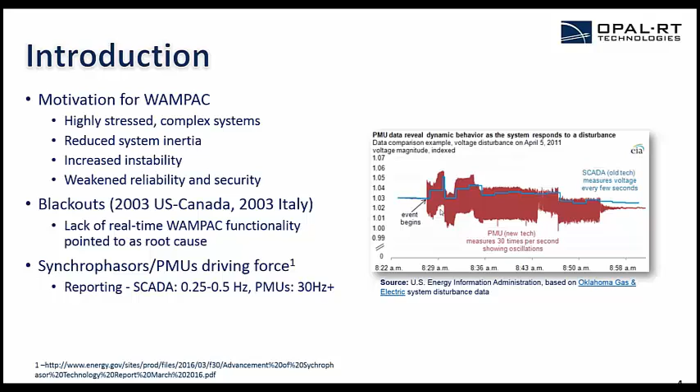Now, these devices and these systems, they are noteworthy because not only do they go between physical locations, they go between jurisdictions, organizations, companies. So it's not just a technical issue implementing these things. It's political, it's organizational, it's law. And what are the effects? So this project has had quite a bit of success. They've dealt with major players in the industry, including Entergy, Duke Energy.

So what the players have found is that they've actually been able, in many cases, to increase system reliability, increase asset utilization and efficiency, power system efficiency, and organizational efficiency. And they've done that through introducing several real-time capabilities as well as study mode capabilities, many of which can be tested using hardware-in-the-loop simulation.

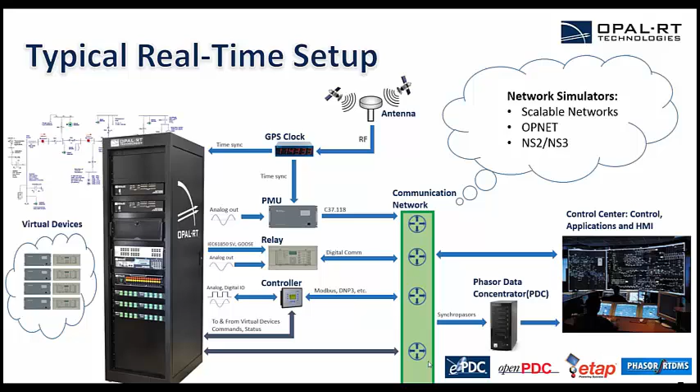We know there are certain researchers who have used OPNET. We're looking at scalable networks too, since it seems to be a very robust real-time solution. And at the end, you're looking to connect to applications, whether they be visualization or even controls. So these are some of the applications we've connected to in this sort of setup.

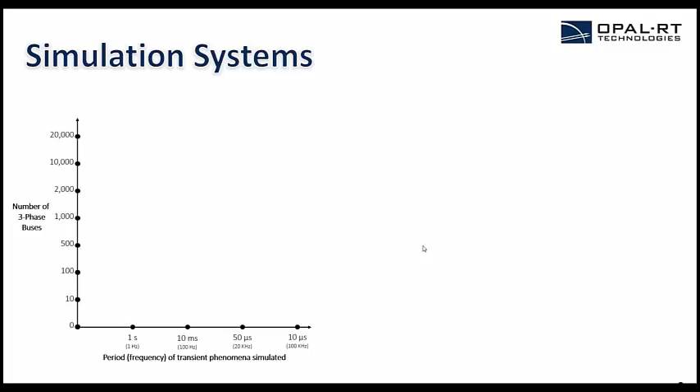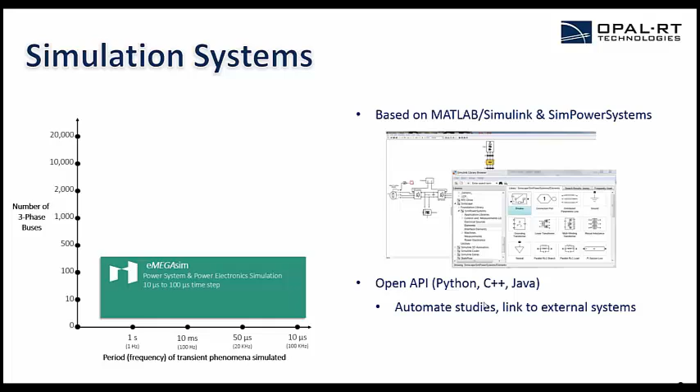And in terms of software, we offer eMEGAsim, which is electromagnetic transient simulation. This type of solution is based off MATLAB Simulink and SimPowerSystems. It's very popular in universities and with users that already know the simulation tool. And it's nice because you're able to automate many functions, and as you'll learn from Luigi, hack it.

The benchmark for this software—we mentioned it can do up to roughly 400 three-phase buses. Well, this is actually a network that was simulated using eMEGAsim, delay-free, so no delay introduced between processing cores on the multi-core computer. It's effectively a regional distribution network with 750 nodes in Italy, a real one. So you can look that up to learn more.

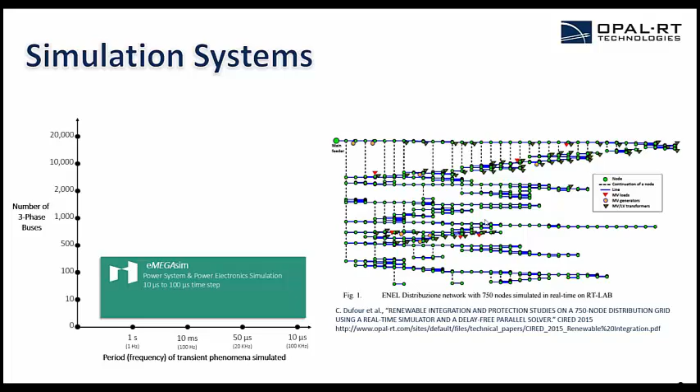And then we have HYPERsim, which was actually developed by Hydro-Quebec, and this is also a very capable software. It's capable of modeling thousands of buses. It automatically distributes simulation across potentially hundreds of processors if you have such a supercomputer. And it also supports automated testing.

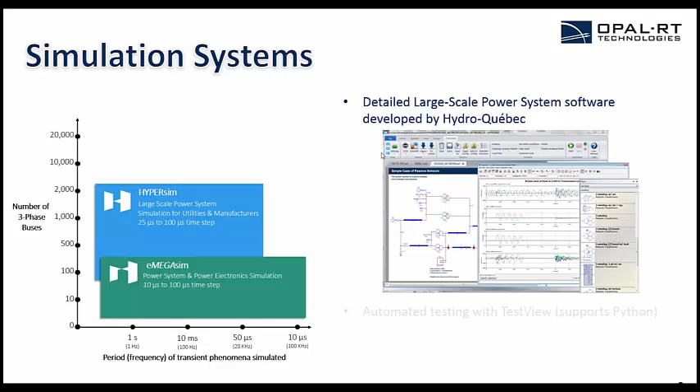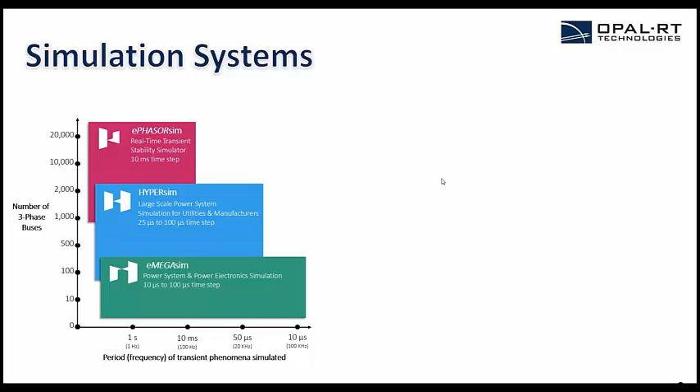And finally, which is a really interesting software for people looking into wide area research, is ePHASORsim. This is an electromechanical real-time transient stability simulator. So unlike the EMT software I just mentioned, it only supports a 10 millisecond time step. You're actually able to import PSS/E, CYME, or DIgSILENT PowerFactory networks directly into that.

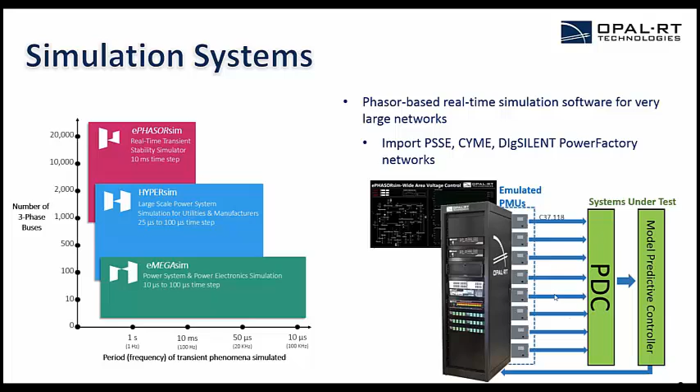You can also model other functions in OpenModelica, so you can bring in your own custom generator models or transformer models. And it allows you to do this sort of simulation where you effectively model a wide area and can model potentially hundreds of PMUs to connect to a controller on the other end.

So this is a more recent product, and we've actually succeeded in finding several clients in industry and academia that have found this application interesting and useful. We're looking forward to seeing more results from them.

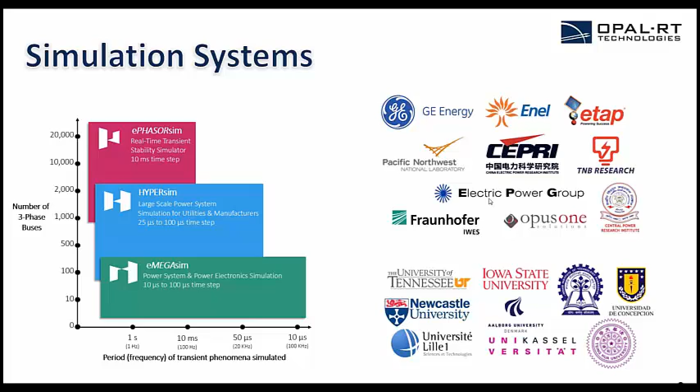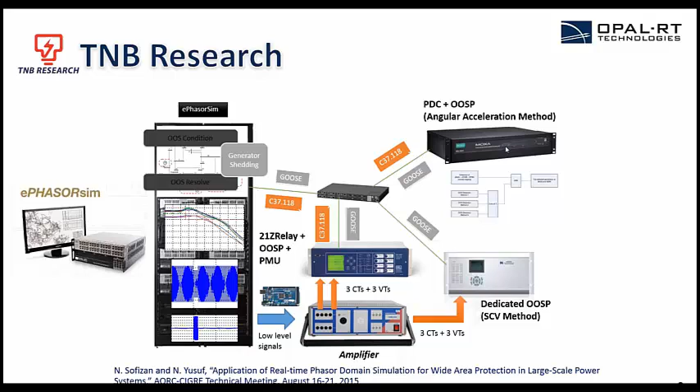One of those clients is TNB Research, and in fact they have a setup where they use ePHASORsim to test and develop an out-of-step protection control system. They've done that using C37.118 streams sent via dedicated relays, and actually from the simulator as well they send commands to generators using GOOSE from the controller. It's a completely closed-loop setup.

Using HYPERsim, this is recent—at NASPI we presented a bit on PMU pre-certification. Certification is very expensive, as some of you may know. So the idea here is, what if you use a real-time simulator to pre-certify your PMU prior to sending it to the lab? There are two ways of doing this.

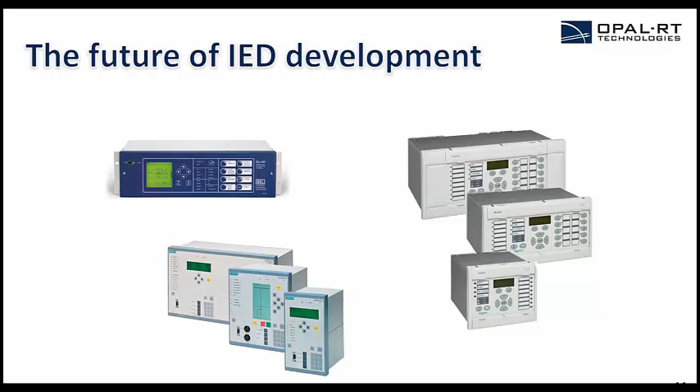Now, some of you are used to seeing these things in your lab or in the field, and you can't really get inside them. They're closed systems. So we've actually partnered with National Instruments to provide an open system for IED development.

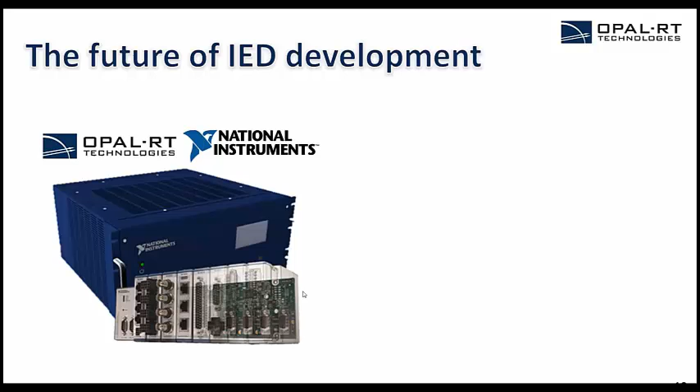The idea there is, effectively you get a box, but you're able to open the box, you're able to change all the modules within, in this case, a compact RIO. And not only that, you're actually offered a library that's already been tailored for the power system industry. So you have the communication protocols that are used in the field, you have tools that you can take, you can modify, and I know Luigi's going to talk about his open source projects, so this is definitely the way of the future.

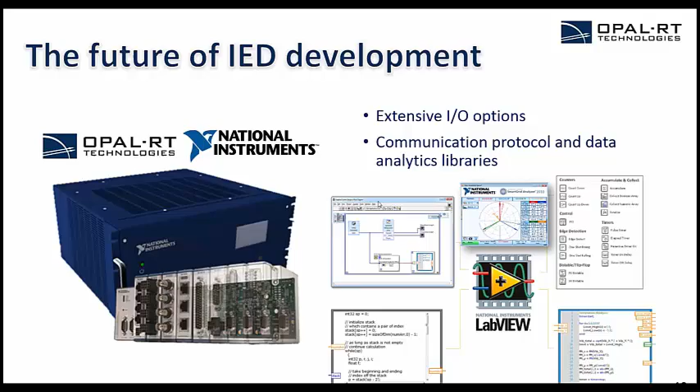We're looking into giving users even more options when it comes to actually making hardware. So it's not just about delivering a simulation tool, it's about delivering the actual hardware that can be used to perform work. So that's my bit, and next up we have Mario Paolone.

He received his Master's in Science and PhD from the University of Bologna in Italy. In 2005, he was appointed Assistant Professor in Power Systems at the University of Bologna, where he served as a Power Systems Laboratory Professor until 2011. Currently, he has since moved to the Swiss Federal Institute of Technology in Lausanne, Switzerland, where he is the EOS Holding Chair of the Distributed Electrical Systems Laboratory. In 2013, he received the IEEE EMC Society Technical Achievement Award. He is the editor-in-chief of the Elsevier journal, Sustainable Energy, Grids and Networks. His research interests are in power systems with particular reference to real-time monitoring and operation, power system protections, power system dynamics, and power system transients. He is the author or co-author of over 220 scientific papers. So without further ado, here is Mario.

Thank you, Thomas, for your kind introduction. I hope that you can see my screen.

The title of my contribution to this webinar is Hardware in the Loop Architectures and Application Examples. My presentation is essentially split into two main parts. In the first, I'm going to talk about the elements that your HIL architecture should take into account when it comes to the simulation environment that you're going to set up. In the second, I'm going to show you three application examples related to WAMPAC systems.

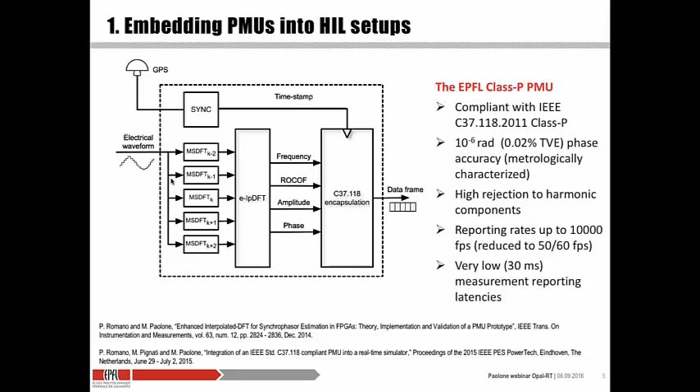The second element that you should take care of is the time synchronization. You have to be sure that you distribute your time sync into the various modules of your HIL setup. In our setup, we are using a Spectracom TSync PCIe that is capable of distributing time synchronization towards the various targets.

Why do you need that? Essentially for 2 reasons. The first one is very obvious: you want to distribute the time to the PMU to time tag your synchrophasor.

That's obvious. The second reason, less obvious, is that this gives you the possibility to time tag the computation of the simulator. You can tag the outcomes of the integration of the differential equations into the simulator. This gives you the opportunity to time tag the true information in the simulator and compare it to what you are sensing outside. This is something you cannot do in the real world, because in the real world you don't know the true state of the system. I will come back to this point later.

The third element you should take care to model is the sensor models. I'm not going to talk about linearity, bandwidth, and saturation, because this is pretty standard, and you can find libraries capable of representing these aspects. What I'm going to talk about is how to embed the noise of the sensors into a real-time simulator.

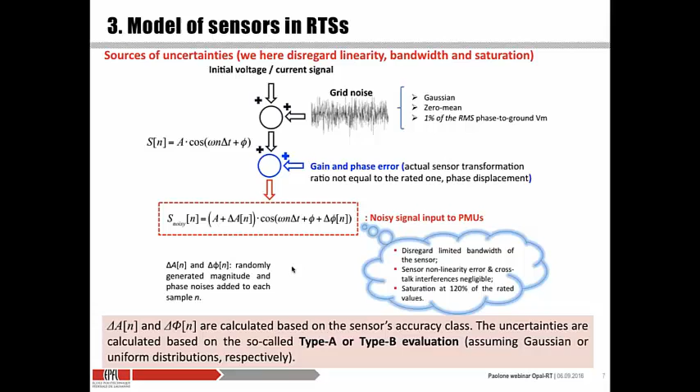What's the output of this kind of stuff? Well, essentially, by adding this noise, you are creating noisy inputs in your PMUs, and these are examples of how these noises affect the amplitude and phase estimations of a PMU. This shows how resilient your synchrophasor extractions are against the presence of noise due to the sensors.

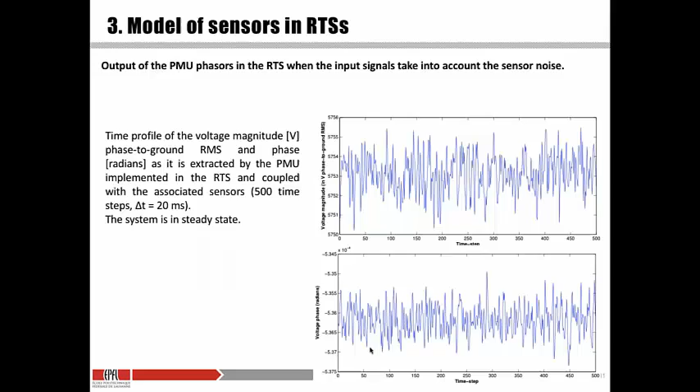So let's jump to the part on the applications.

Of course, you can do that only if your system frequency is constant, and in particular, if it is equal to one of the bins of the DFT. So in this case, you can really tag which is your true system state. At the same time, you're distributing also the clock to your application. In this case, it is the PDC.

Where you also do the aggregation, and then you're pushing the data frames to your application. In this case, it is a simple state estimation process. It can be either a least squares process or a Kalman filter. So that's the application.

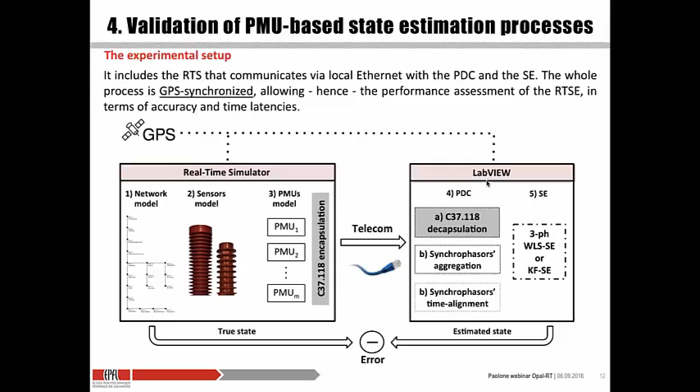What you can do with that is characterize the performance of your state estimator. Why? Because you can inject bad data into your simulator. You can inject biases in your sensors. You can also remove some of the data frames, so you can see how robust your state estimator is against these kinds of failures in the sensing system.

So here I'm going to show you how we did this setup when we have dynamics which are embedded into the nodes. In particular, we're embedding dynamic loads or distributed generators by using controllable current sources in this specific case. So considering the true system state, since we're not changing the system frequency, essentially you can compute exactly one of the DFT bins, and this is what you can baptize as the true system state.

So this is what the simulator is computing, which is then fed to the sensors, which are then adding noise and nonlinearities to that, which are then sensed by the PMUs and then estimated by your state estimator. So actually you can metrologically characterize the whole chain from the true system state down to the estimated ones, and then you can do a comparison of the performances of your state estimator. So this is what you get.

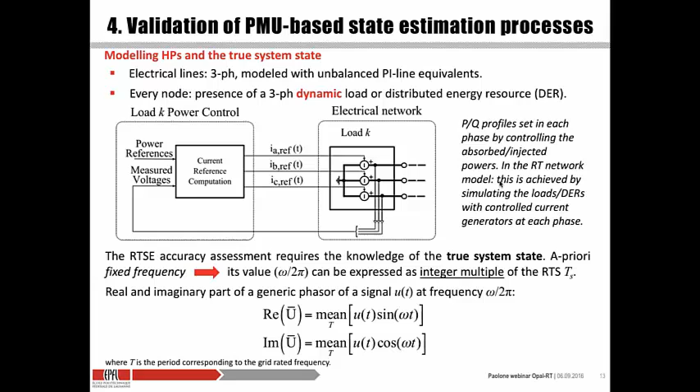So we are using a true system. It's a distribution system that was the target of an FP7 European project. Actually, it's a system located in the Alliander grid in the Netherlands. Here you can see the configuration. It has 18 buses. It's a 10 kilovolt line-to-line system. We also have distributed generation. And we are sensing 10 out of the 18 nodes with PMUs.

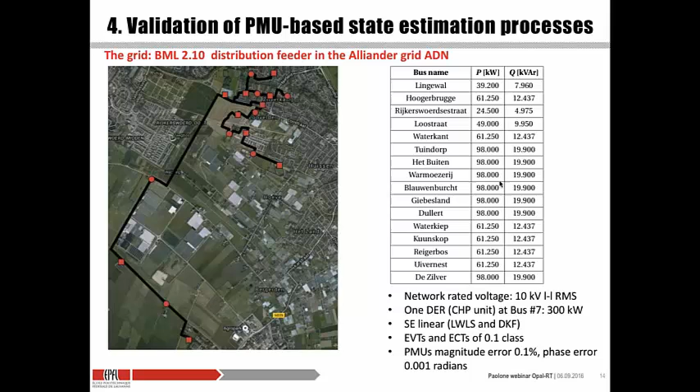These were real PMUs. And before going into the real field, we ran a real-time simulation to characterize the performances of the state estimator. So through the process I was describing before, we were able to characterize the means and the standard deviations of the absolute errors in the magnitudes and phases of the state estimates. So here you can see the four quantities, namely on the top you see the voltage magnitudes in per unit, means and standard deviations, and on the bottom the same quantities, means and standard deviations, for the phases of the phase-to-ground voltages.

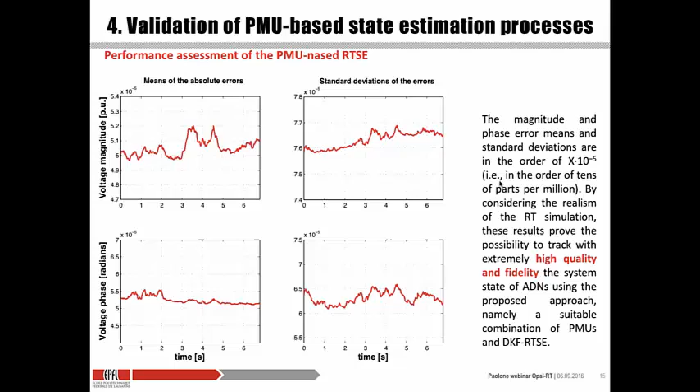So you can see that we are obtaining quantities which are jittering in the range of 5 times 10 to the minus 5 per unit for the amplitudes, and almost the same quantity also for the phase. So essentially, after running this characterization, we're saying to the operator, look, if you are going to have this noise level and you're going to deploy this sensing infrastructure, these are the kinds of uncertainties you can get in your assessment of the system state. So it's a kind of performance assessment.

So the second element that we were able to test was time latency. Essentially, we were interested in characterizing the latency from the moment we were collecting the PMU measurements, the moment these measurements were entering the PDC, the moment these measurements were pushed into the real-time state estimator, and the moment the state estimator was capable of estimating the system state. This is important if you are interested in closing the loop, as we'll see in a while, if you want to do voltage control or fault handling applications.

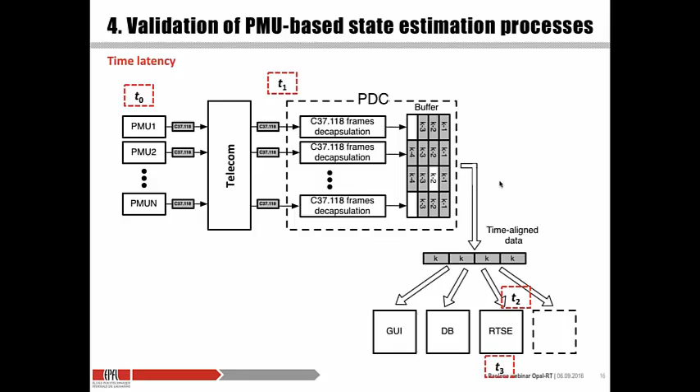So this is the kind of information we were interested in: characterizing essentially 3 latencies in these 4 time instants. And these are the kinds of results that we get. Essentially, we were able to assess, with the HIL architecture I was describing, the 3 cumulative distribution functions of these 3 delta t's.

So essentially, we were able to close the loop from the moment we were sensing to the moment we were estimating the state. This was essentially providing us an average latency of 53 milliseconds with a jitter of less than a millisecond. And this is a kind of information which is particularly useful, especially if you're interested in fault location or relaying applications.

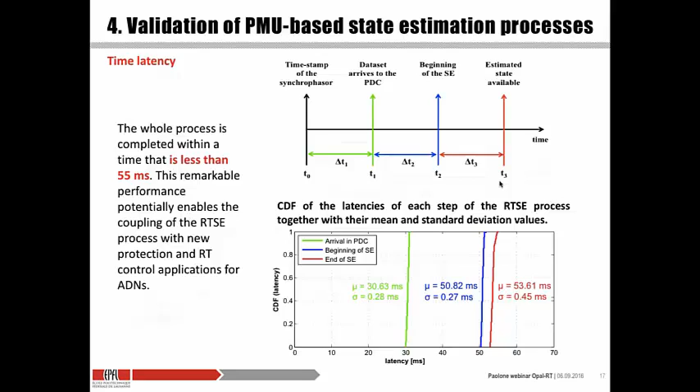So you should be able to characterize which is the jitter of your information data flow. So the second application I would like to show is relying on the system state estimation. So essentially, we are assuming to know the system state with a pretty high refresh rate, and we would like to use this information to do voltage control.

So essentially, we have an online centralized optimization tool, which is computing sensitivity coefficients. Sensitivity coefficients are essentially how much a voltage is varying in a given node as a function of all the injections. These coefficients can be computed as a function of the system state in a closed form. We have a paper that has shown how to do that. And now we would like to see how we can use these sensitivities to distribute the control through broadcast signals.

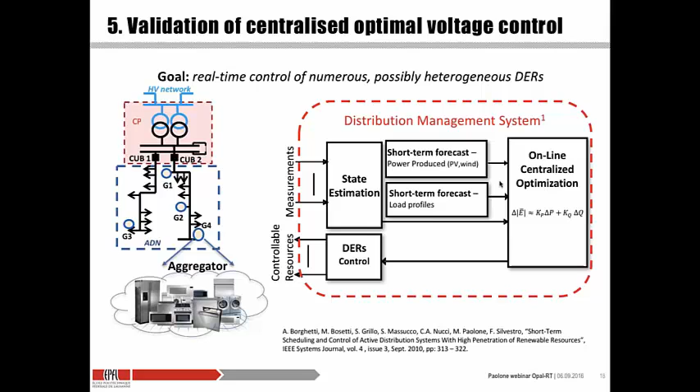So essentially, we would like to distribute broadcast signals to aggregators, which are distributing them in the form of broadcast signals to thermostatic controlled loads, so traditional demand-side applications. We are broadcasting signals per node, and these broadcast signals are unique per each network bus. And we would like to see how this application, which is described in these 2 IEEE Transactions papers, can be characterized in terms of latencies in the hardware-in-the-loop application.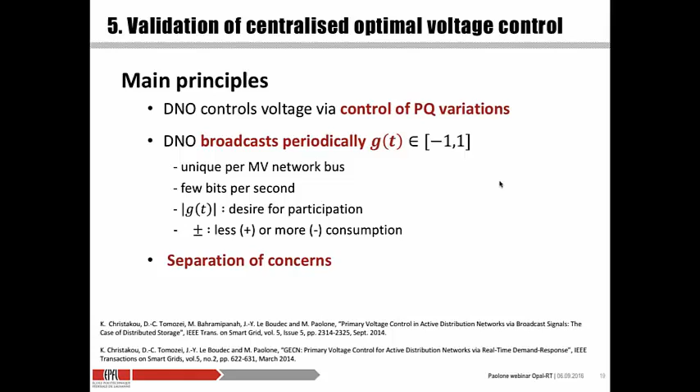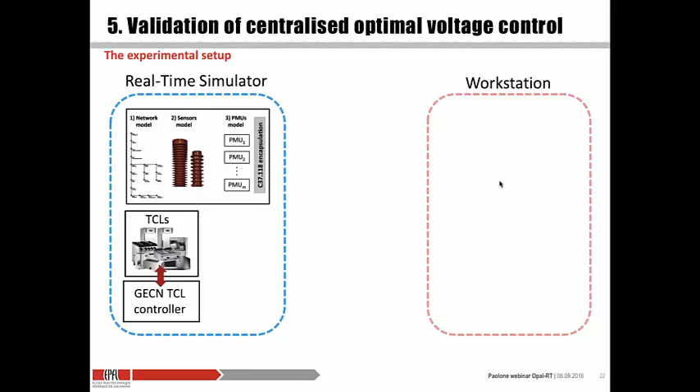So essentially, we have the same setup as before. We have a real-time simulator, which is embedding the network model, the sensor models, and the PMUs. On top of that, we also embed into the network model the thermostatic controlled loads and the controllers, which are playing the game of these broadcast signals. At the same time, we're embedding into the simulator non-elastic demand, because TCLs are, on the contrary, elastic demands, and active generation, in this case non-controllable PV resources.

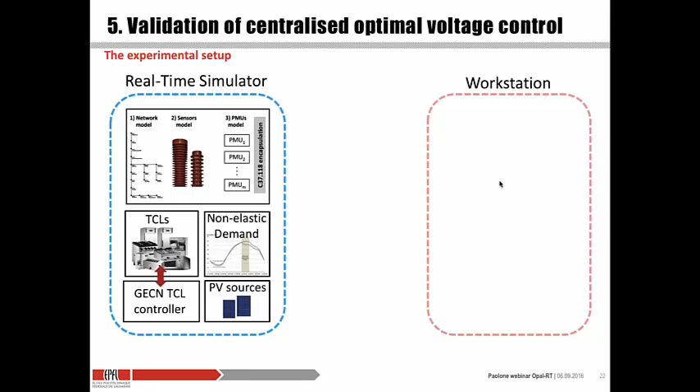So essentially, we send PMU data to a workstation, which is containing a PDC and a state estimator. The state estimator is feeding the demand-side centralized optimization tool. In this case, you can see this acronym GECN. GECN stands for Grid Explicit Congestion Notification. It's a kind of protocol that we're using to compute the broadcasting signals for the demand-side management.

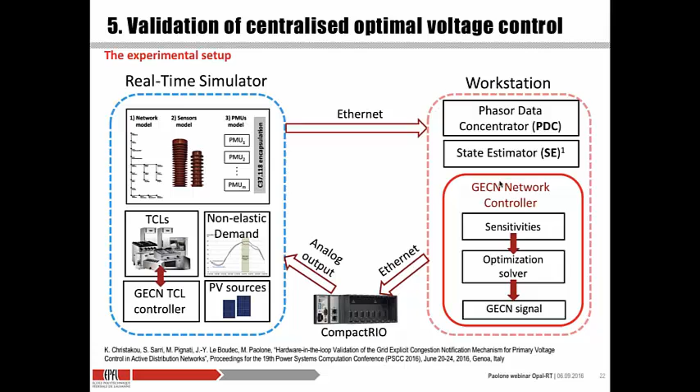So essentially, we compute the sensitivity coefficients, we feed an optimization program, and then from the optimization program, we compute the broadcast signals per node. Then we distribute the broadcast signals through a CompactRIO that is then feeding this back into the analog inputs of the real-time simulator, and we close the loop. So everything is GPS synchronized. Again, we are using the same distribution system we were showing you before. So it's the same network of Alliander.

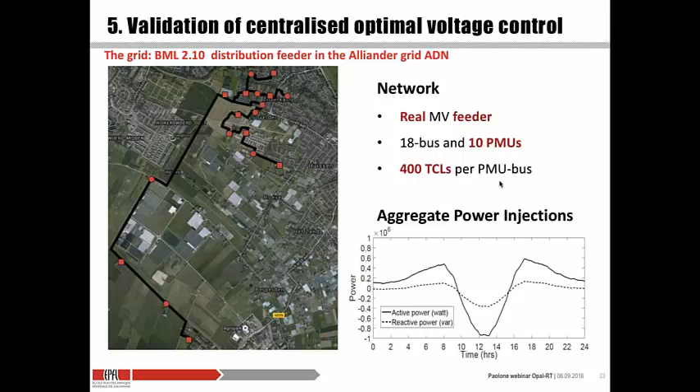Again, the same configuration. Here you can see the aggregated power injections, active and reactive power. You can see that there is a big hole in the middle of the day. Why? Because this is the typical effect of the PV injection. So you can see a kind of duck curve, you know, the duck curve from the California ISO. Here you can see a scaled version in a distribution network.

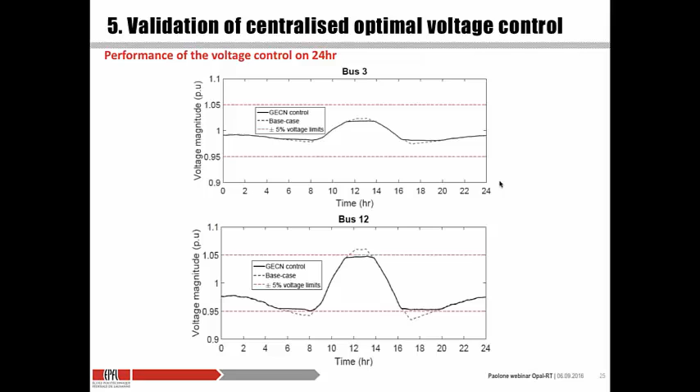So here you can see the performance of the voltage control on a 24-hour profile. We were running a real-time simulation for 24 hours, so it was a simulation that took 24 hours to be completed. On the top you can see bus number 3 is a bus where you don't really need to do voltage control because the voltage is always within the bounds. On bus number 12, on the contrary, you can see the effect of the GECN controller to keep the voltage within the bounds. And you can see the effectiveness of this control loop in this HIL simulation.

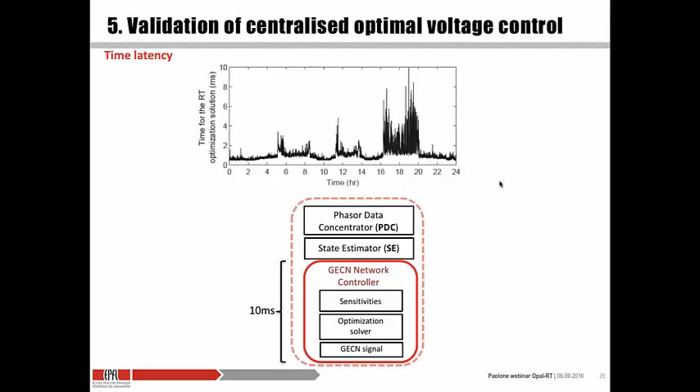The last application that I would like to show is about the use of this framework to do fault location. We published a paper in IEEE Transactions on Power Delivery in 2016, where we are essentially using state estimation processes to locate the faulted line. The principle is very simple. We're running parallel state estimators. In these parallel state estimators, we're able to add a virtual bus. This virtual bus is essentially a bus that is containing the fault.

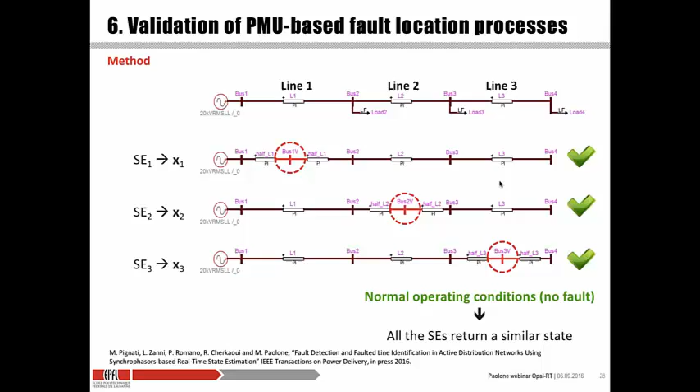So if you don't have a fault in the system, all the state estimators that contain this virtual bus are providing you the same results. If you quantify the weighted measurement residuals of these state estimators, they're providing more or less the same kind of numbers. As soon as you have a fault in your system, for instance, here I'm adding a fault in line number 2, only state estimator number 2 contains the right topology. Therefore, the weighted measurement residuals of state estimators 1 and 3 will explode, literally.

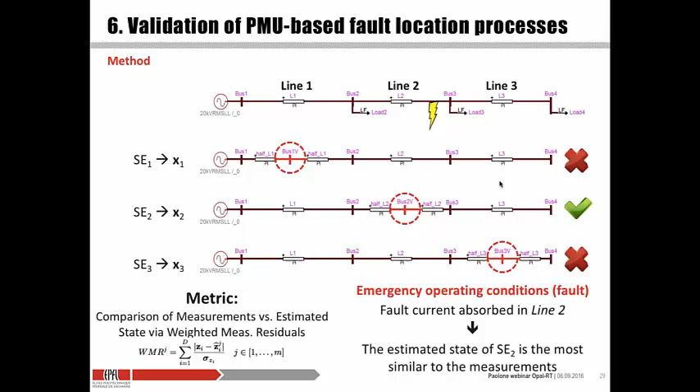And only the WMR, which is briefly recapped on the bottom left side of the slide, is kept at a value which is comparable to the conditions before the fault. So this is the metric used to distinguish which is the state estimator with the right topology, which essentially tells you which is the correct line that has the fault.

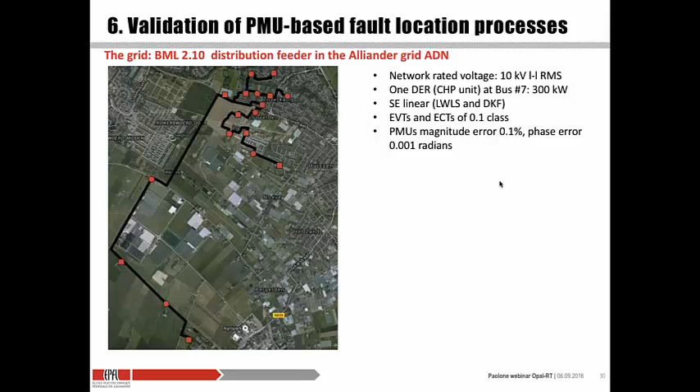So this is the kind of application you can also imagine deploying in your HIL. For this specific case, we were able to test fault location applications and validate whether our process was able to detect, identify and locate fault types which are symmetrical or unsymmetrical, namely single phase, two phase, three phase. We tested fault impedance up to 1,000 ohms. We were capable of testing radial and meshed systems, and neutrals that were isolated or grounded.

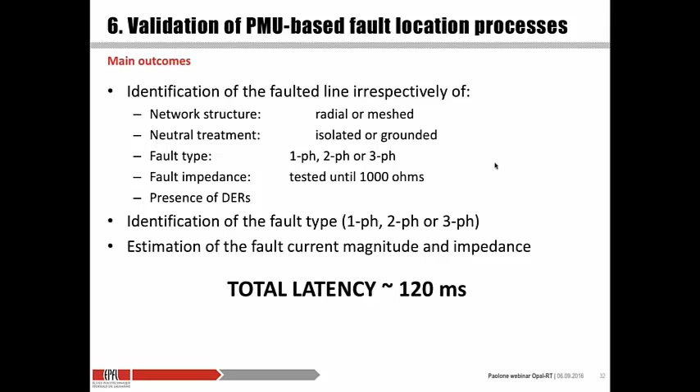So in summary, HIL are fundamental tools to run performance assessment of PMU-based processes. Fundamental elements, beyond the grid model, to be represented are time synchronization, synchrophasor estimation processes implemented in metrologically characterized PMUs, and sensors in terms of noise, saturation, linearity, and bandwidth. The potential applications you can feed once you have fulfilled these elements are PMU-based real-time state estimators, centralized optimal voltage controls, line congestion management, which I have not discussed, and fault location. Of course, there are many more applications, but we focused only on these specific ones.

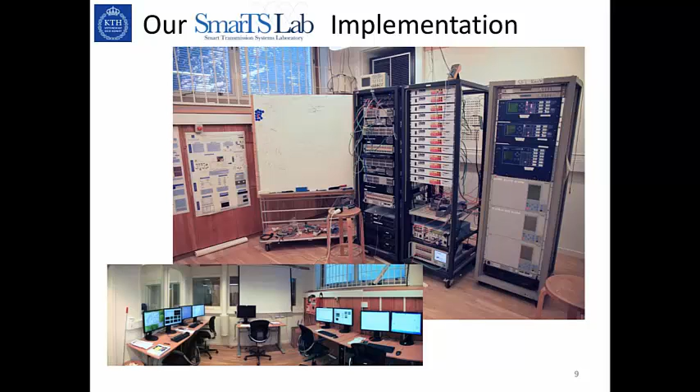So if you're going to deploy it in the field, provided that your simulator model is accurate enough, pretty much things will work. So people cannot claim that my stuff only works on paper, but we're actually taking that extra step. And to do that, here's a little flowchart of how we work. Okay, so you have to develop a model, and I will show you one of the active distribution network.

Then you need to configure the model by going into the backplane with the analog outputs, or as Mario explained with configuring the streams from PMUs. In this case we configure the analog outputs and feed either amplifiers or directly the PMUs through the low voltage interfaces. All of this equipment has to be configured.

You have to download firmware for the compact RIOs, and you have to configure it, and then configure the PDC to read the data. So it's not like plug and play and go. You need to do a lot.

To stream the PMU data, you have to configure all the PMUs, and then create something called output streams. These output streams are actually the basis I use to decouple what is a PDC, which I think should be left alone to do its job of concentrating and time aligning data, from what is an application development environment, which could be any workstation located anywhere and be able to read this stream and use the data.

So how do you implement a new application? Well, it turns out there was not much back when we started. There was OpenPDC and it was really hard to do. So we implemented different kinds of mediators and toolkits.

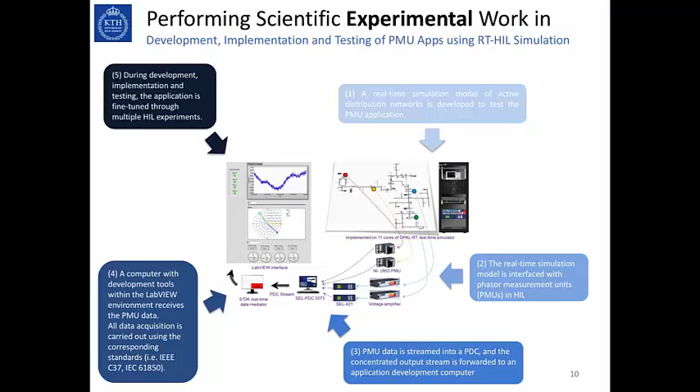I think this is a really nice example. I call it the golden crown because it's really a nice model, I think. Almas, my student, has developed some gigantic models also, but I give a chance to somebody else to show their work. So this was done mostly by a student called Hossein.

He's a postdoc still, and the first version is published in Mario's journal, where he's the editor-in-chief. You can just click there and it's open access, and what you have here is like 79 nodes and 10 different components, deployed in the first version in 11 cores of the eMEGAsim simulator.

Where you see here, wind is a wind turbine. You can see somewhere a battery - I think this is energy storage. No, this is an energy storage. You have some PV. You have protections in the model.

So it's really, really a nice model, and the aim is that you have transmission, medium voltage, low voltage, and residential low voltage. So you have three-phase and single-phase, and so on. It's a really nice model to try to understand active distribution networks.

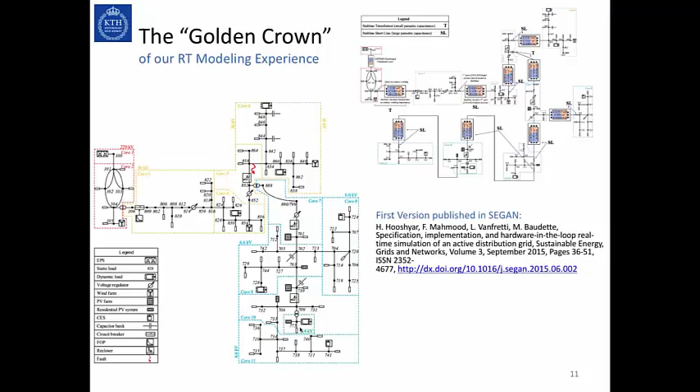A little bit more work has been done recently with Christian Dufour, actually the guy from OPAL-RT who develops the Artemis library. The methodology we have here is called stubline decoupling, which introduces errors into the simulation. So we thought we should get rid of that. This SSN, State Space Nodal Solver from OPAL, was used to implement this model.

Now not only do we get more accurate results, but we also use fewer cores. This is down to 7 cores using this technique. So that's really nice.

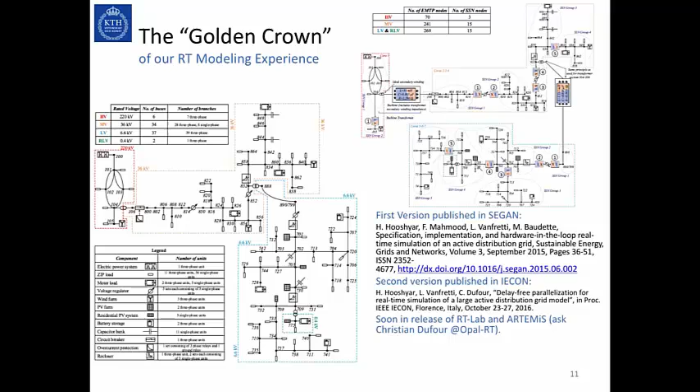It will soon be released in RT-Lab in the libraries from ARTEMiS. But if you don't want to wait, just go to GitHub. Here's a link, and you can download it and play with it. It's released under the GPL version 3 license, so make sure you read what that means.

You're supposed to make things - if you're going to distribute some new version, you have to make the source available to everybody else.

All right, so now you have the model ready. What are... there's no such thing as a real-time monitoring application - that's useless, because you cannot react in real time. You have near real-time monitoring applications, and this aims to provide fast updates in near real time. So 10 seconds, I would say, or tens of seconds to a few minutes, when reaction is still possible with a human being.

Okay, so this is near real time, because real time is 1 second equal to 1 second, and if we talk real time in terms of loop cycles, then you're talking a few tens of milliseconds. So using a library that we'll show later, we have implemented all of these different applications. You have monitoring and visualization. Here are the references you can take a look at.

Some mobile applications. This is a really nice hack, because once we had our toolkit in LabVIEW, we just used the LabVIEW toolkit to implement these mobile applications, and it was really fun.

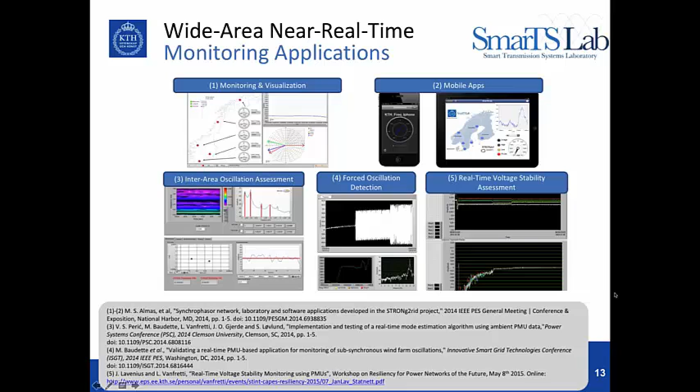So that's for monitoring. There's a new application here using this model. The idea is that you can monitor transmission and distribution grids at the same time and decouple their contribution to voltage stability. What does that mean? It means you can tell who contributes to the voltage stability of the system.

So this is the transmission network, and we're monitoring with PMU1, which looks at the input of the transmission network. And here you have the distribution network, which you're looking at from this aggregated load. You have another PMU, so you're able to decouple the network.

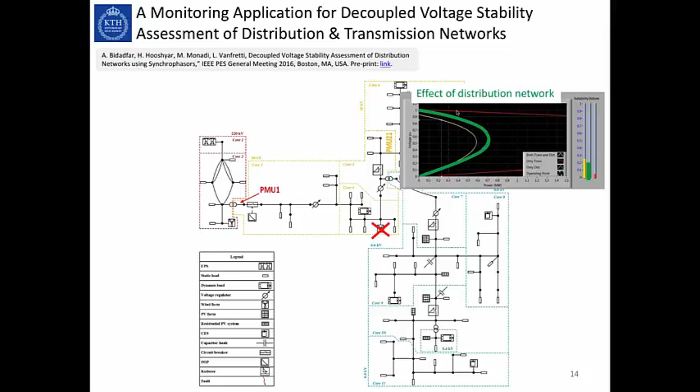So what happens is that we don't have this wind farm connected. You can see the effect of both networks is the yellow one, and it's actually some sort of combination of the effect of the distribution network and the effect of the transmission network. So the real limit of the stability of the whole system, if you assume some sort of saddle-node bifurcation, is more or less driven by the distribution network.

So what happens when you connect the wind turbine? Well, voila, it turns out that you have an increase in the total stability of the system, and the indexes of instability are decreased everywhere. Why is that? Because you're providing reactive voltage compensation from the wind turbine. You're controlling the voltage, letting more power flow through here, so your margin increases.

This is a really nice way of understanding how an active distribution network impacts the system in different ways, but also the value of PMU data to monitor these sort of situations, because if you lose a wind turbine in this case, you're really going to decrease the stability of the system. So if you were operating here and you lose the wind turbine, you're pretty much going to have a problem.

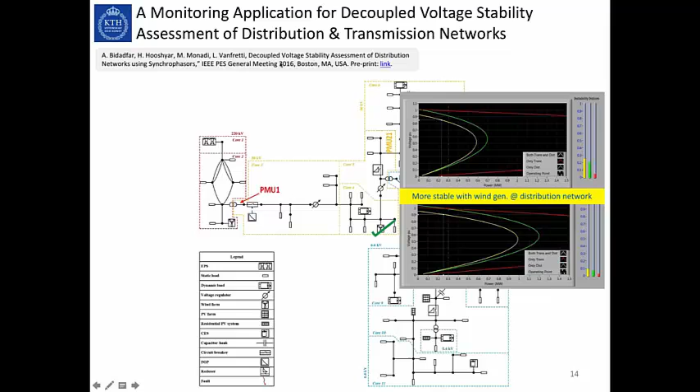All right, so you can read all about this in this paper. It's not yet on IEEE Xplore, so you can click on this link and you'll get it.

Okay, real-time control and protection. These are actions aiming to steer, optimize, and protect the overall system in the time scale of a few milliseconds to tens of seconds. This is completely different from the reaction time of control room operators, which uses data from 2 to 5 minutes, and if they're lucky, they have some PMU that's a little bit faster.

So if you have this time scale, you actually have to keep latency to a minimum, and these applications must act automatically. When you hear about power system control, forget about control design, forget about all these things. You have to think about embedded system limitations, okay? This is what you're going to have to deal with.

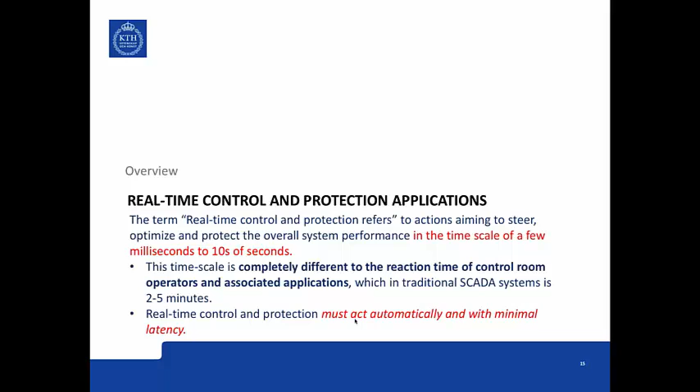So the approach we had here with Almas, my PhD student—well, we didn't do these things in order, but this was the philosophy behind it. The philosophy was that we're going to convince anybody that our controls are as good as anything out there. We have to be able to show them that.

So the first thing was to test and assess the stability provided by a standard PSS. There's a paper here that goes through all of these details, and you can look at the PSS functionality of the multiband PSS. Okay, so we want to implement wide area damping controls, so we've got to be better than this PSS that functions locally.

So the next stage was to develop all of the models to use in a real-time simulator for real-time software in the loop simulation, so we could derive requirements for real-time hardware in the loop. The models implemented include the multiband PSS, and also the so-called phasor POD, the algorithm we want to use for wide area control, because you don't need a model of the system to try to damp the oscillation.

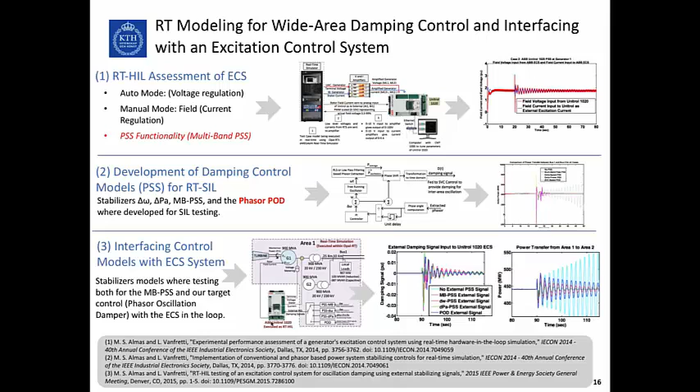All right, so finally, if you look at the way that we built this architecture, my idea was to have a generic system. Why do you need a generic system? Because I don't want to make 1,000 of these things. I just want to make one box that you can configure and insert here into the auxiliary signals. And it can be controlling anything, a generator, an SVC, whatever. Why do you have to have a dedicated box?

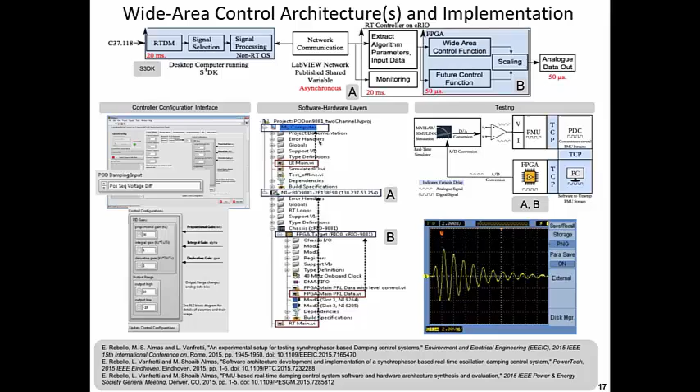So this was the controller that was implemented. In this case, we took these layers, they were cleaned up a lot and fixed, additional control was implemented, and it was tested in software in the loop and hardware in the loop. So the nice thing, if you look at this example, is that you have two types of signals, voltage angle difference, and just the voltages from a specific location, and you have software in the loop and hardware in the loop.

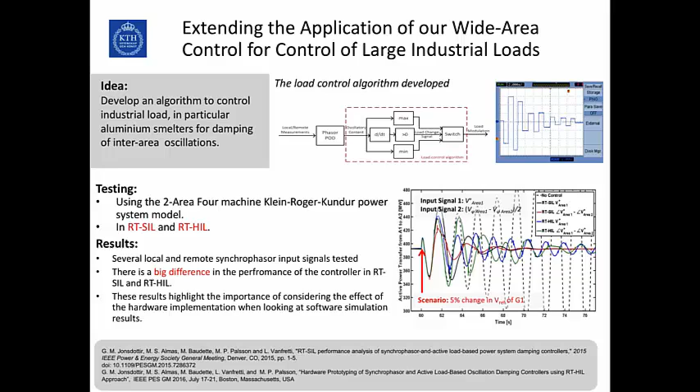And people ask me, why is hardware in the loop not better? Well, the answer is that with hardware in the loop you have delays, you have noise, you have a lot of things. And all of the stuff that you have in hardware in the loop, you will never see in a simulation. These are the kind of learnings we're getting out of this. We're starting to understand all of the limitations, all of the real problems that we have to cope with. So this is an extremely good learning experience, I think.

So I don't know how much time I have left. Yeah, I'm slightly over. Okay, so I'm just going to point out, you're over by 10 minutes, but just so you know, you only lost 5 people out of 110. So we'll let you continue. If the audience doesn't mind, I'll keep going, because if I haven't bored you now, I won't bore you with the rest.

All right, so the last area that I want to show you is Almas's PhD work, and it's how do you do wide area protection? People talk a lot about having PMUs and PDCs and all this big infrastructure. And I think that's rather silly, actually, because protection should be a little bit simpler if you're going to depend on it. So we looked at islanding because it's really interesting, and there are severe problems in northern Norway where we used to work.

So we wanted to do islanding detection, and the standard for DG says that it should be within 2 seconds, including the detection of the islanding, trip signal generation, and trip signal transfer. So to do this, we need to have a non-detection zone. It's the range of power mismatches between the DG supply and the load. And this will tell you if the method will fail or not.

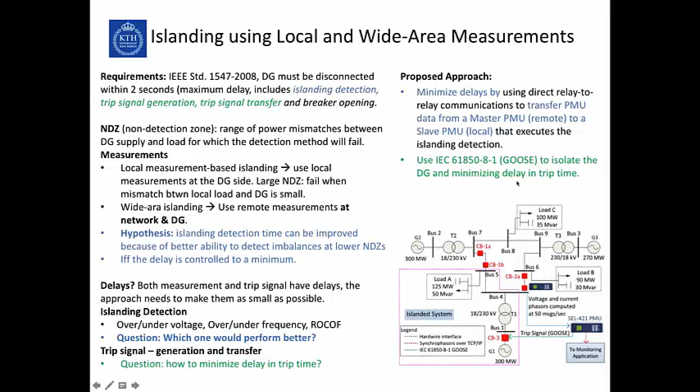Well, the proposed approach was to minimize the delays by doing direct relay-to-relay communication using the PMU data. So basically you have a master-slave configuration. And then use 61850 to isolate the DG and try to minimize the trip time. That's why the approach is a hybrid synchrophasor and GOOSE approach, because we're combining synchrophasors with GOOSE. So what Almas did is, since you see here, there is no special library, nothing to parse. So this was implemented directly on the relays.

local over-under voltage islanding and wide area over-under voltage have a different NDZ. What this translates to is that, as you can see here, the blue line is for the over-under voltage, and here is the 2-second threshold. And what happened? Well, we actually reduced the tripping time in total under a mismatch of 40%. And not only that, it operates with a smaller mismatch. So this is what is shown here, that our non-detection zone is actually reduced with respect to local phasors, and that's of extreme value, I think.

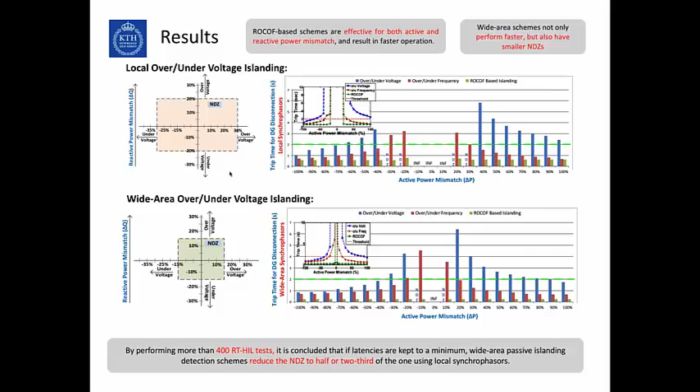And finally, I'll show you the tools, just telling you what they are and where you can find them. Why do we make tools? We're not software engineers. Well, we ended up in this situation that we had all the infrastructure in the lab, PMUs, the network, the PDC, the protocol, but the real-time data was locked into a vendor-specific software system, and the historical data is generally in a proprietary database. So I thought we really need an interface using standard protocols and a flexible development environment so that we can actually implement something for ourselves.

In the traditional approach, the road is closed. But if we have some tools, you can take the next step to walk the last mile, as I said. And you have to keep in mind our context, that we have students and researchers that do not have proficient C++ programming skills. So we need to get people within 6 months doing something new. So we needed this flexibility. And this is more or less also the story of the 5 years that we've been doing work. So we started with different tools. We have one called BabelFish version 1, BabelFish LabVIEW engine.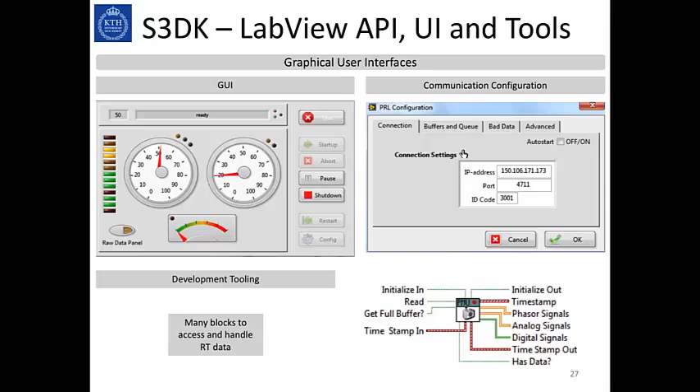And where we use these tools is mostly on any computer here. The S3DK, Babelfish, or Khorjin can be deployed in any computer using Windows. This one in any computer. And then Khorjin can be really run anywhere.

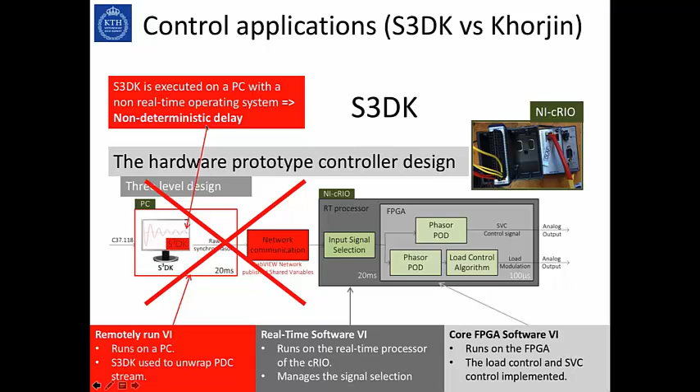And to look at the example, this is the controller that I showed you before, the load controller. This was done with S3DK, and this was the architecture. Now that we have Khorjin, we can replace this non-deterministic delay by running it in a real-time processor at a 20 millisecond loop rate. And what results is that we remove the problem of the non-deterministic latency from the computer, and you can see that we are able to stabilize the system faster.